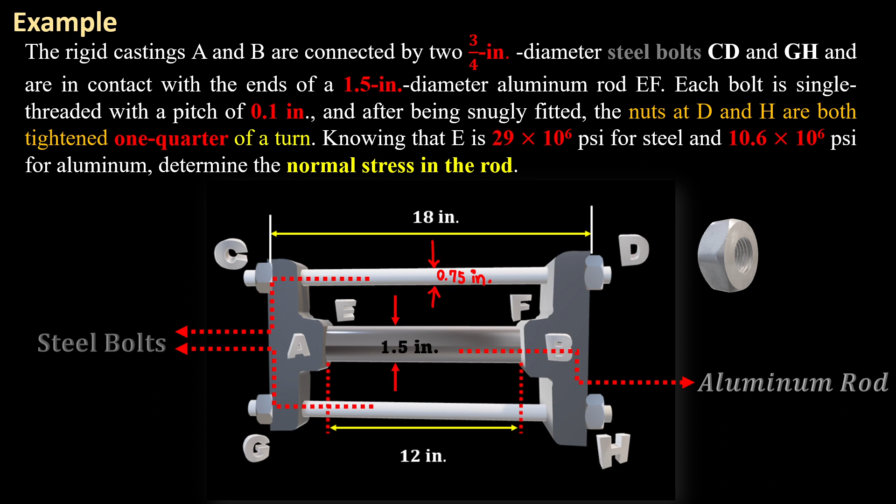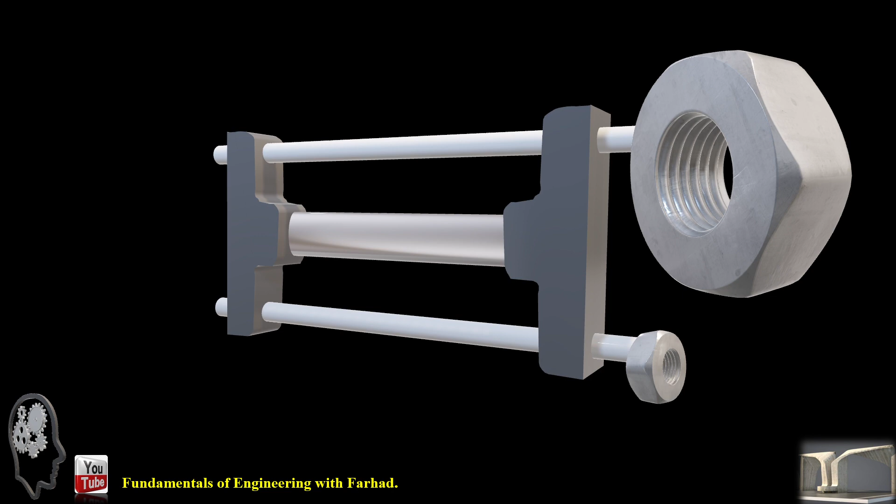So to approach this problem, we have to look at the configuration for free body diagram at each part carefully. The dimensions of each bolt and aluminum rod are provided. And by having the free body diagrams first for bolts and aluminum bar, so these are the bolts and the center one is the aluminum rod.

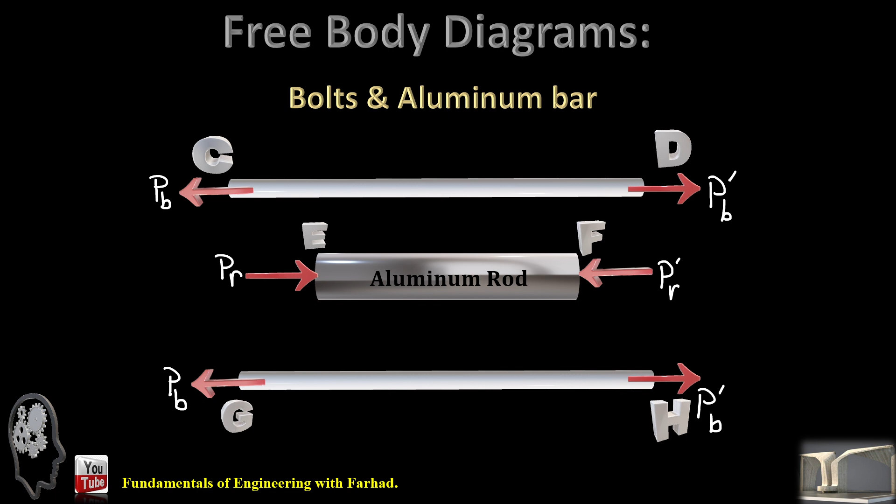So as soon as we tighten the bolts, there is a tensile force inside the bolts, as you can see here. And to be compatible at the same side, they are pushing the aluminum rod, as you can see. So if we call the force in bolts P sub B, stands for force in the bolts, and P sub R stands for the force at the rods. The compressive force and tensile force are shown here.

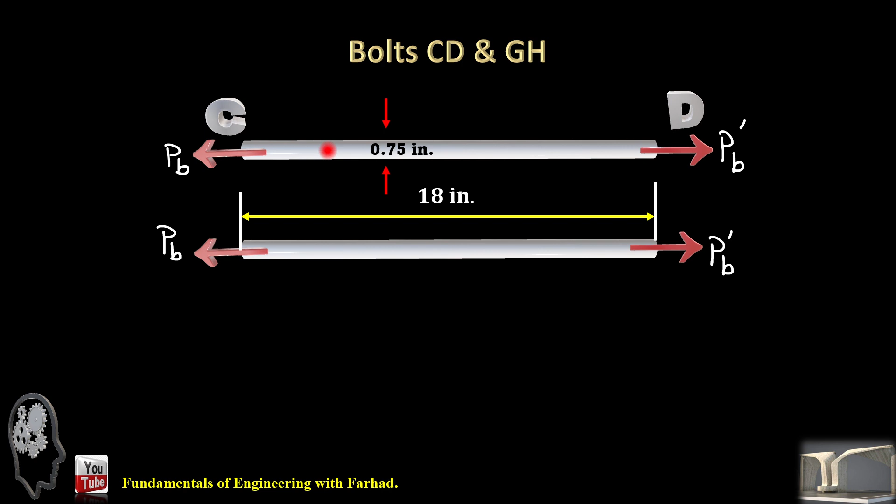So both CD and GH have the length of 18 inches, diameter of 0.75 inches. And if we want to see what is the deformation on each of these two steel bolts, delta B is PL over EA for the bolts, and that's positive because that's an increase in length. PB is unknown, length is provided, area is provided, modulus of elasticity of steel is 29 times 10 to the 6 psi. So we can have a relation of delta increase in length, which is a positive one, based off force in the bolt.

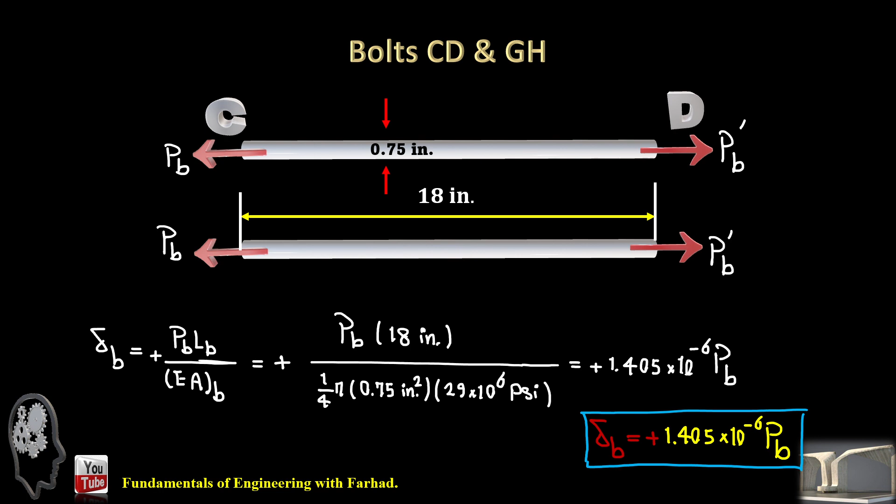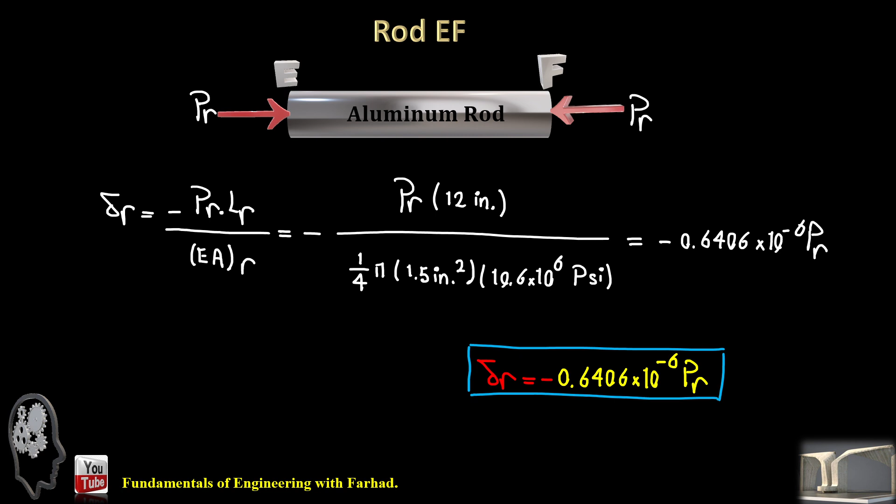So if you jot down, delta B is positive 1.4 times 10 to the negative 6 times force at the bolts. And do the same for aluminum rod. We have the length, we have all the information. We just write in parametric format for delta of rod based off the compressive force in the aluminum rod. So delta R is negative because the aluminum rod is shrinking, based off the compatibility of deformation in the rigid casting, and the displacement of D relative to B.

So as soon as we tighten the bolt, there is a relative displacement of D versus B, and that's nothing but a quarter of a pitch, a quarter of 0.1 inches, because the pitch was 0.1 inch based off the problem statement, and that gives us 0.025 inches in terms of relative deformation of D versus B as soon as you tighten the bolt. And at the same time, we do know delta D with respect to B is nothing but delta B minus delta R.

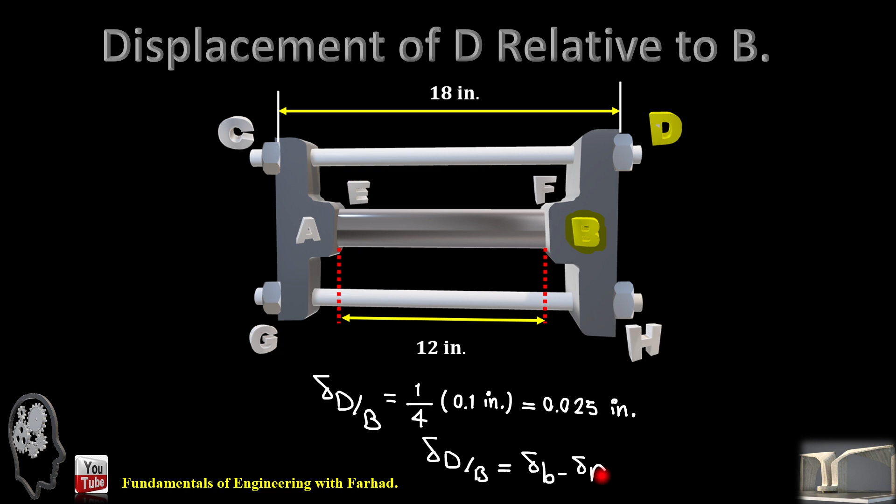And if we just jump to the rigid casting, you can easily see there is a force of rod which pushes the casting, and two forces of bolts because there are two bolts, at the top and at the bottom. So free body diagram, summation of forces in x equals 0. It just says PR minus 2 times PB is equal to 0. We get a relation of force in rod which is equal to 2 times force at the bolts.

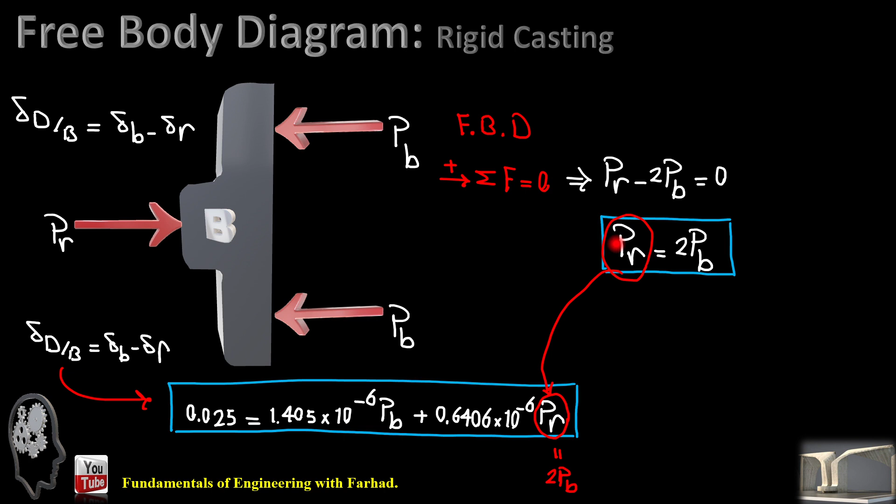And based off delta D with respect to B from the previous part, if we just replace, we already know delta B based off force of bolt, and delta sub R based off the force in the aluminum rod. If you just jot that down in this equation, it gives you a numeric value based off PB and PR. There are two unknowns here, and if we just plug in PR, which is 2 times P at bolt, we simplify our equation to only one unknown.

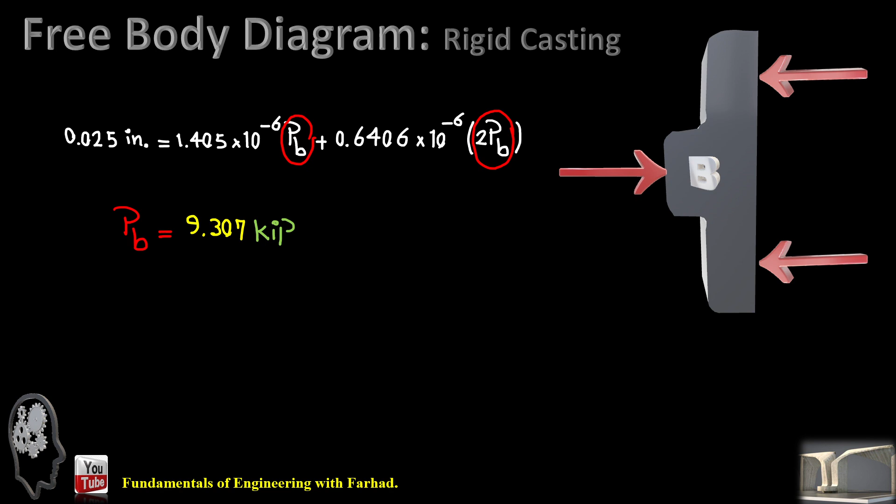And if you just solve the equation for P sub B, force at the bolt, it gives you PB is 9.3 kilopounds, and P sub R, force in the aluminum rod at the center, is twice that, 18.61 kips.

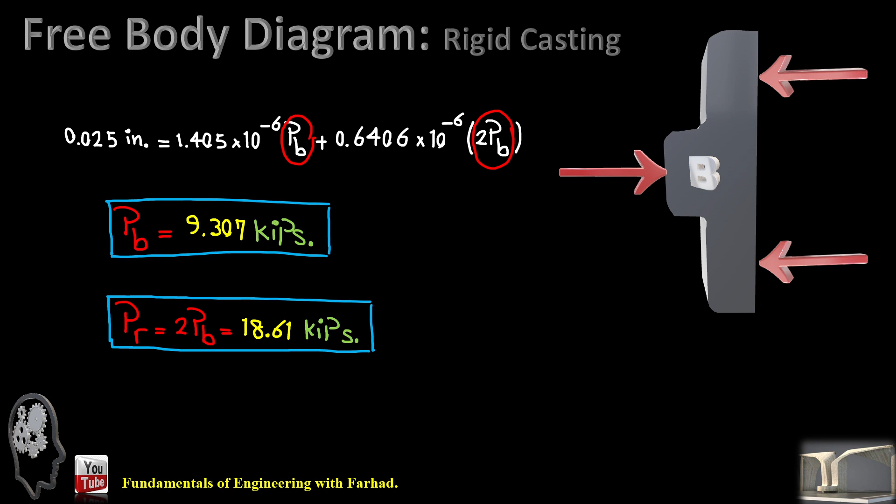Stress in the aluminum rod, which was the intention of this problem, is simply the force over the area for the aluminum rod, and that's 18.61 kilopounds over a quarter of pi times 1.5 inches squared. It just gives us 10.53 ksi for stress at the rod.